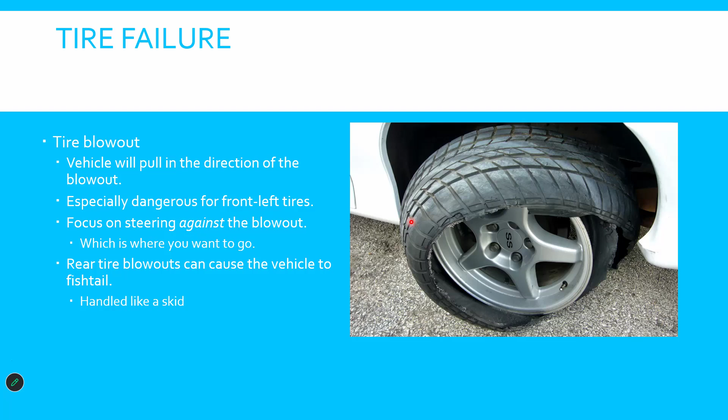You want to stabilize the vehicle if this happens, which just means if it's pulling to the left, you turn to the right and try to keep it as straight as you can. Pull off the road and turn on your hazards.

So why do we turn our hazards on? So people see you - yep, it's a flashing light, and people know that something's going on. If your hazards are on, all four of your blinkers are flashing at the same time, so it tells people there's some sort of emergency. Hopefully they see you in time because a flashing light will draw their attention.

That all make sense? Okay, here's a short video example of what a tire blowout could look like.

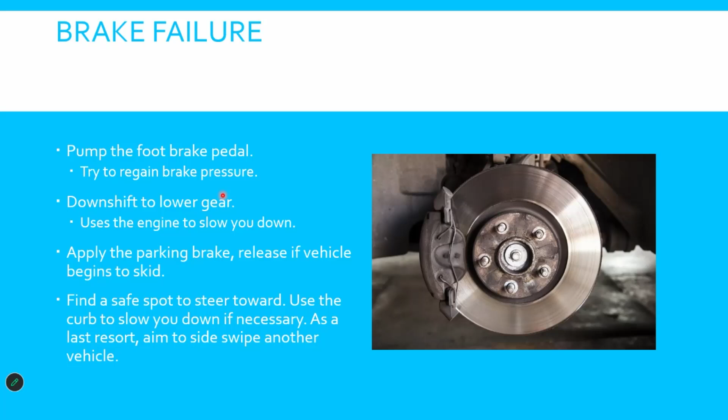Here's a video on how the brake system in cars work. It's good to know, just so you can understand how they work.

Welcome to Autotech Labs. Today we will see how an automotive disc brake system works.

Let's see the principle behind the disc brake system. The brake system works based on Pascal's law. The law states that pressure exerted anywhere in a contained incompressible fluid is distributed equally in all directions throughout the fluid. Let's make it simple.

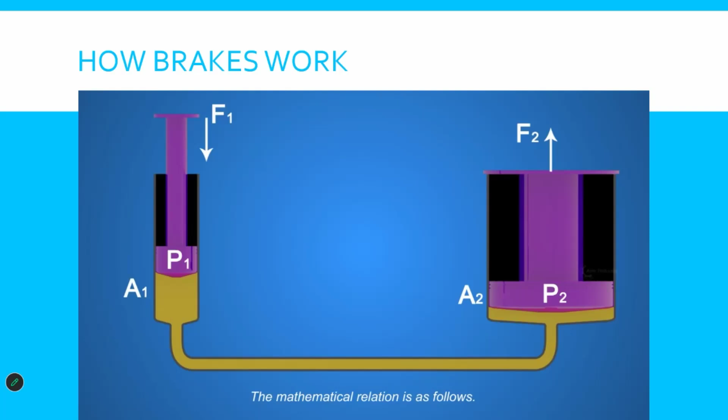Consider two cylinders with pistons, connected to each other, and filled with incompressible fluid. The mathematical relation is as follows: F1 is the applied force on the left piston, F2 is the received force at the right piston. A1 and A2 are surface areas of both pistons. P1 and P2 are pressure experienced by both pistons.

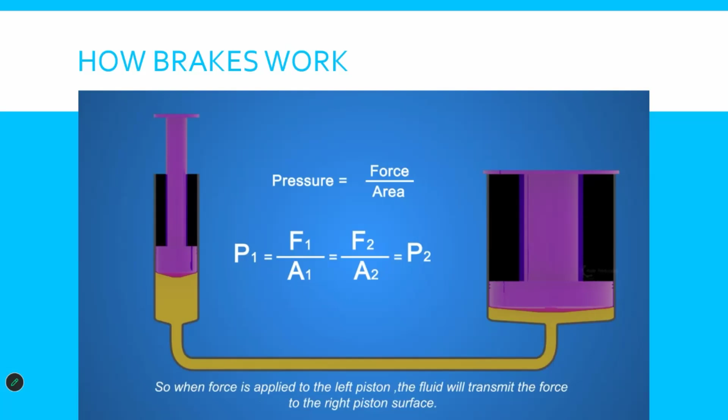Pressure can be stated as force experienced per area. So P1 equals F1 by A1, and P2 equals F2 by A2. According to Pascal's law, pressure on both pistons are equal, which gives us P1 equals P2. So, when force is applied to the left piston, the fluid will transmit the force to the right piston surface, but it will be a factor of the ratio of the two piston surfaces. This concludes that, with a small force F1 at the left piston, we get a higher force F2 at the right piston, provided A2 is greater than A1.

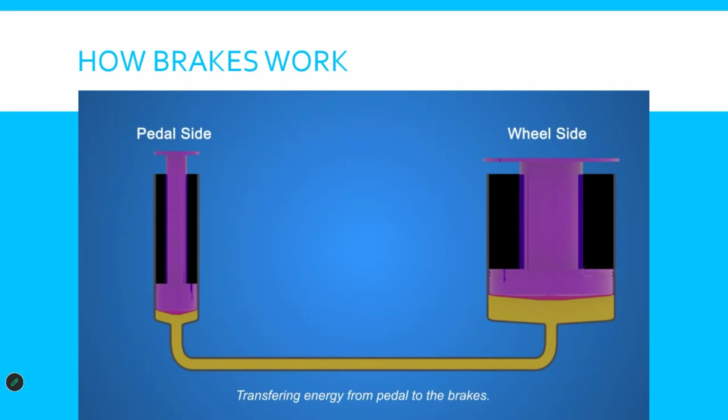With this, the left piston can act at the pedal side, and the right piston can act at the wheel side, transferring energy from pedal to the brakes. Now we know the theory, let's see how this works in real life.

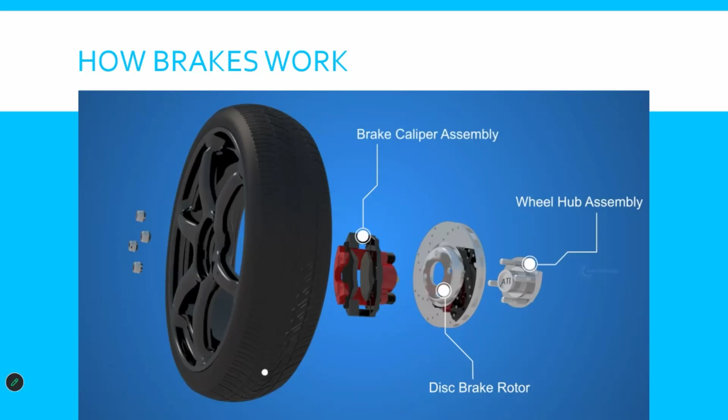Let's see the exploded view of a car wheel, and the parts involved: the wheel hub assembly, the disc brake rotor, the brake caliper assembly, the wheel, and the lug nuts. The wheel hub assembly holds the wheel and the disc rotor, and the bearing inside it allows their smooth rotation.

The disc rotor is the part to which the brake pads squeeze against. This creates friction that retards the rotation of the wheel. The disc rotor produces a lot of heat due to this friction, and the drilled holes provide ventilation to remove this heat.

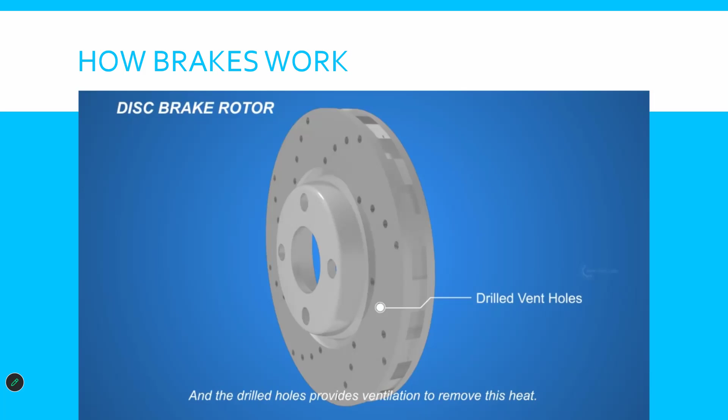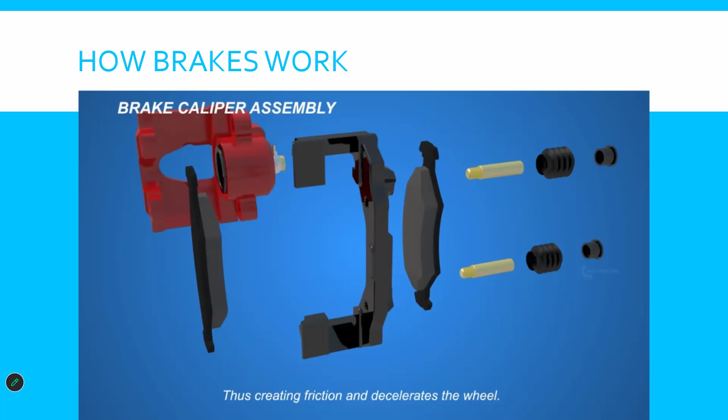The brake caliper assembly uses the hydraulic force from the brake pedal to squeeze the brake pads to the rotor surfaces, creating friction and decelerating the wheel. The caliper assembly consists of the caliper bracket, slider pins, dust boots, inner brake pad, outer brake pad, caliper frame, and inside it, the piston. The caliper frame has a banjo fitting, through which the fluid reaches the piston.

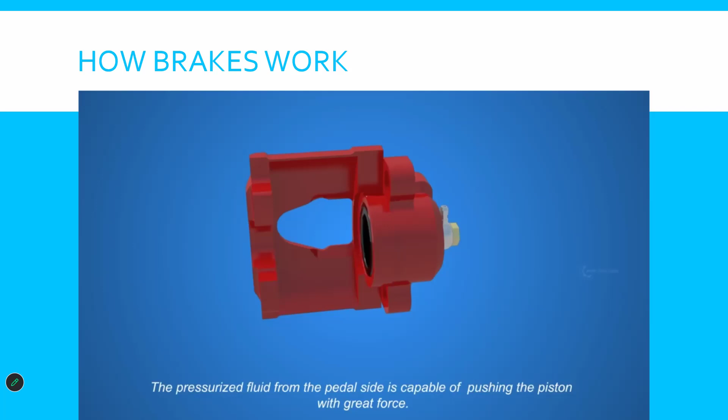The pressurized fluid from the pedal side is capable of pushing the piston with great force. Also, the caliper frame is free to slide along the slider pins within a fixed extent. Now we know the parts, let's see how it works.

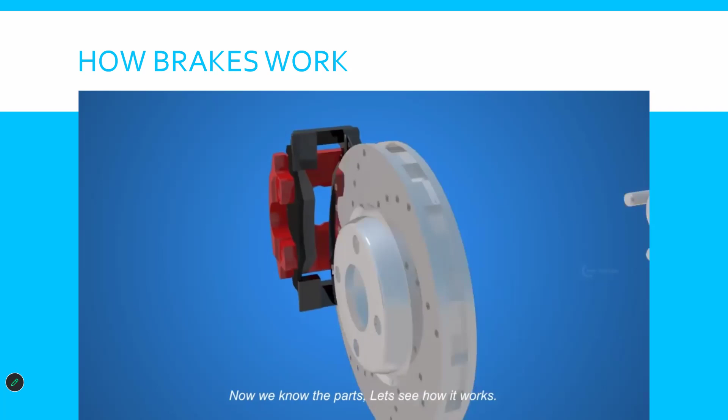When you apply the brake, the caliper will receive high-pressure hydraulic fluid from the brake master cylinder. The fluid will push the piston, which makes the inner brake pad squeeze against the disc rotor surface. As a result, the fluid's backward force will push the caliper frame along the slide pin, which makes the outer brake pad squeeze against the other side of the disc rotor.

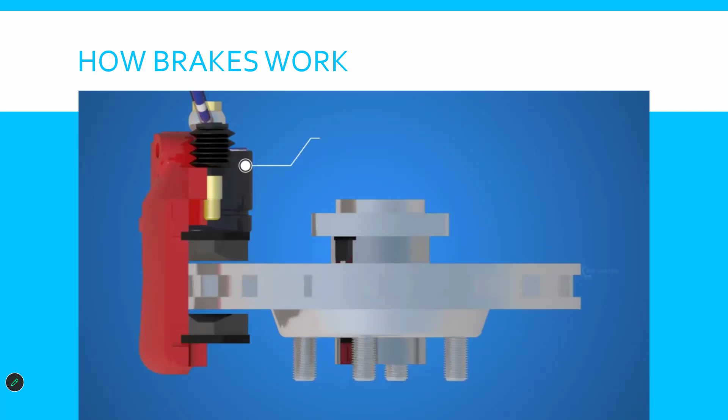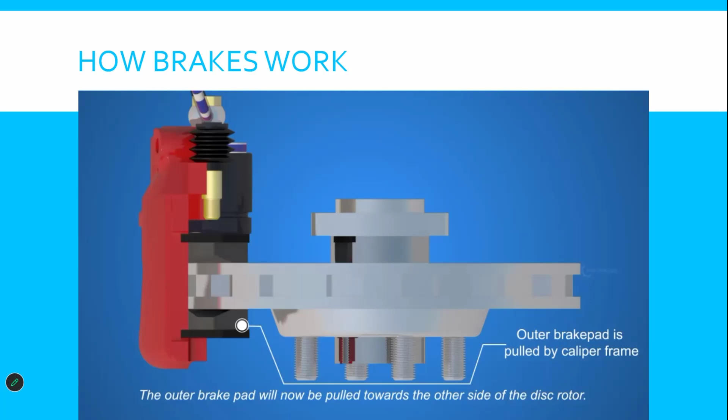Let's see one more time from the top view. The fluid pushes the piston, and the piston pushes the inner brake pad. Once the inner brake pad is pushed against the rotor, the fluid will push the caliper frame, and the outer brake pad will be pulled towards the other side of the disc rotor. This is how the disc brake system works on the wheel side.

In the next part, we will see what a master cylinder is, and how it transfers fluid.

That's a boring video, but that's basically how it works though. You've got your brake pads that push against the rotor, and the harder it pushes, the faster it's gonna stop. So, this is some steps to do, or tips, if you have brake failure. I will warn you, this guy is very excited, but if you have brake failure, he's got some good tips for you.

Hey everybody, I'm here today to tell you how to stop your car when brakes fail. If you are in the unfortunate situation where your brakes have failed and are not working, I'm going to show you exactly what you need to do to bring your car to a complete stop safely and effectively. Let's get right to it. I'm going to turn the camera around so I can show you exactly what to do.

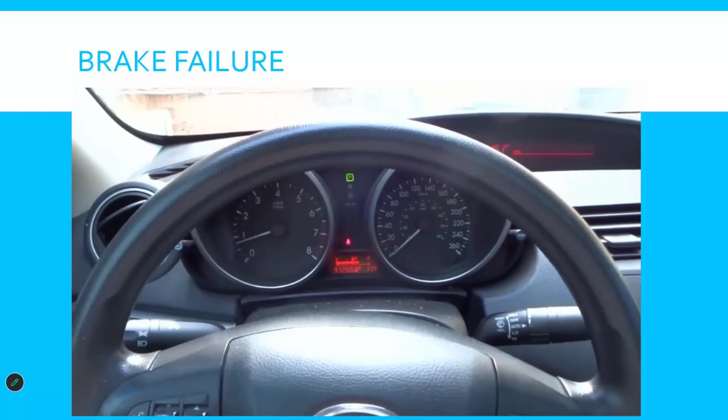I'm going to break it down into a step-by-step tutorial. Step number 1 is stay calm. I know your immediate reaction will likely be to panic and freak out when you push your brakes and realize that they're not working.

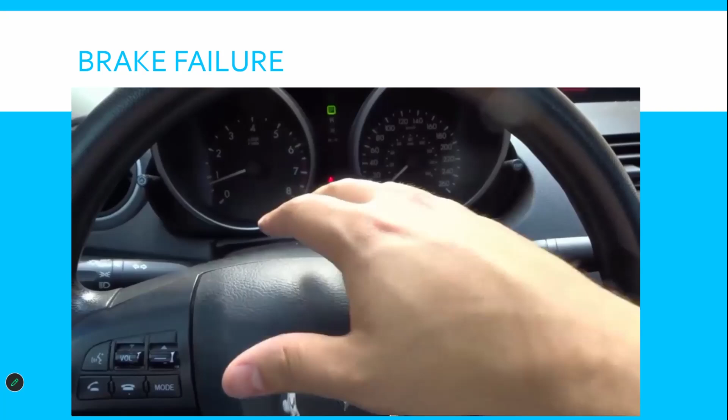That's one of the worst things that you can do. Staying calm will allow you to do the other steps effectively, remember what I'm telling you in this video, and actually do those things. So step number 1 is stay calm.

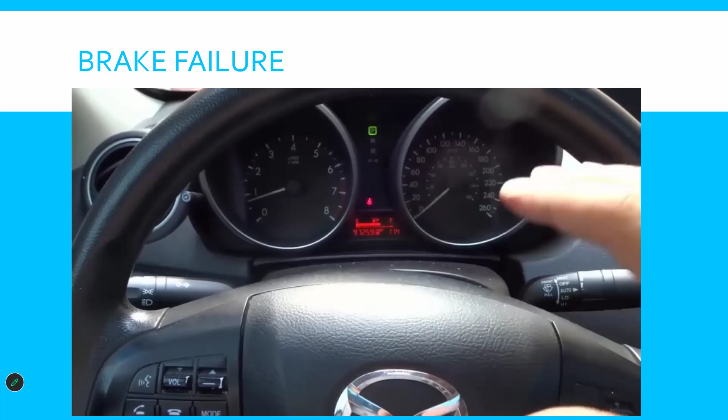Step number 2, put your hazards on, just like that. When you put your hazards on, it will let the other drivers in front of you, behind you, and potentially around you know that something is wrong with your car, that you're experiencing vehicle difficulty. When people see your hazards on, they'll give you some extra space because they know something is wrong, and that extra space can be very useful in bringing your car to a stop safely when your brakes have failed. So put your hazards on is step number 2.

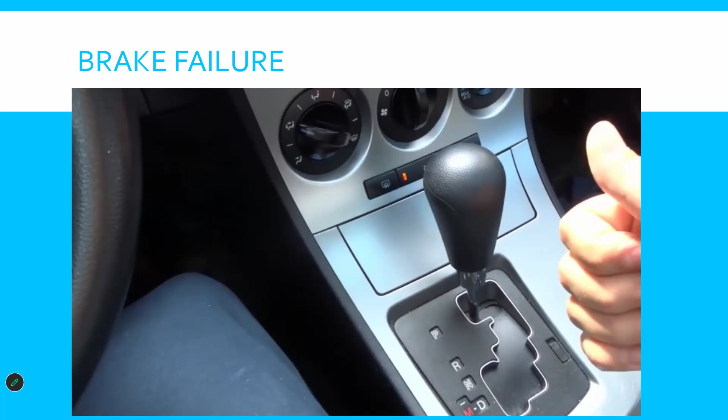Step number 3 is downshift. If you drive a manual car, it's easy to downshift: push the clutch in, shift to a lower gear, release the clutch. That will slow your car down.

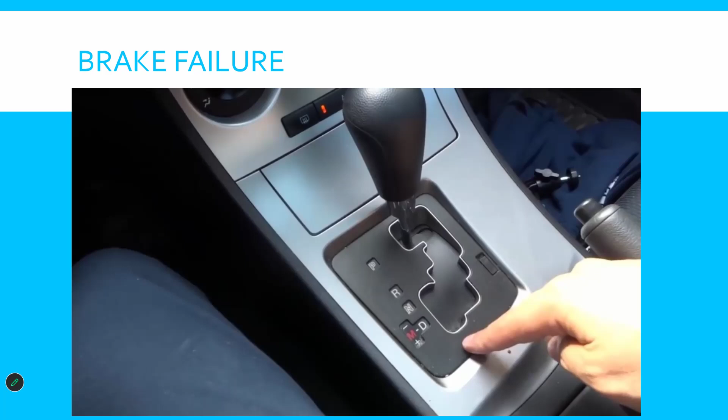If you're in an automatic car, there are a few different options. In most automatic cars, they'll have a shifting option over here on the shifter, so I would switch into this option, which would allow me to downshift. There's also sometimes in modern automatic cars paddle shifters which allow you to downshift. In some older cars there are different options. If you don't have this, there are options like the number 2, the number 1, and even the letter L that will allow you to downshift the car.

The one thing I'll tell you is make sure you're downshifting into appropriate gears. You don't want to downshift into too low of a gear and harm your engine. Make sure you downshift into a gear that's appropriate for your engine speed and vehicle speed. You don't want to damage your engine trying to bring your car to a stop. So step number 3, once again, is downshift.

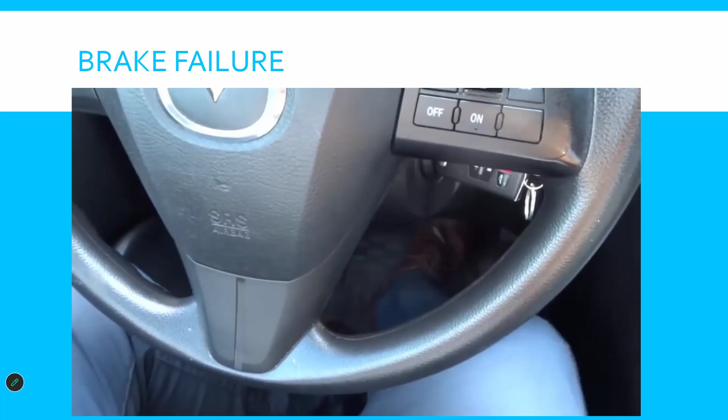Step number 4 is pump your brakes. What you want to do is pump your brakes. Sometimes that might allow your brakes to start potentially working again, or even barely working again. It might slow you down. It's worth a try—pump your brakes and see if it helps. That is step number 4.

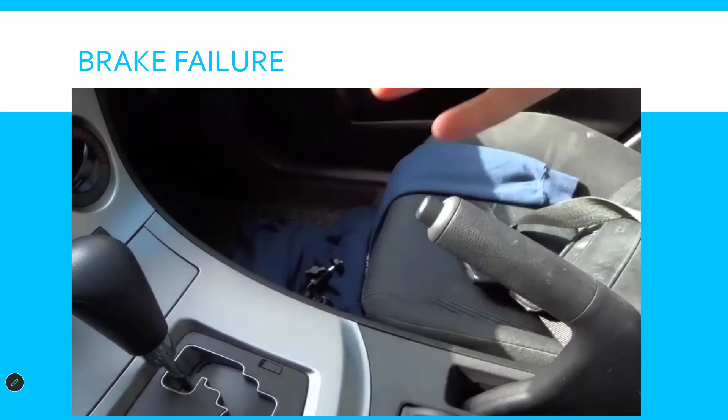And last but not least, step number 5. As you've downshifted and you're slowing the car down, and after you've tried pumping your brakes, your last resort to bring the car to a stop is to use your emergency brake. There's a specific way to do this, so please pay attention. I have an emergency brake right here. Now what you don't want to do is crank your emergency brake like that. That's one of the worst things you can do, because your car will likely skid to a stop and you'll lose control completely, and that's not good.

What you want to do instead—my emergency brake is down right now—is press and hold that button in, and slowly raise the lever up, just like that, slowly. That will slowly apply the emergency brake. It will act similar to the way your car brakes. You want to slowly and gradually bring it up. It's going to start slowing the car down. When the car's almost at a complete stop, you can fully pull it up, and that will bring the car to a nice, smooth, and slow stop.

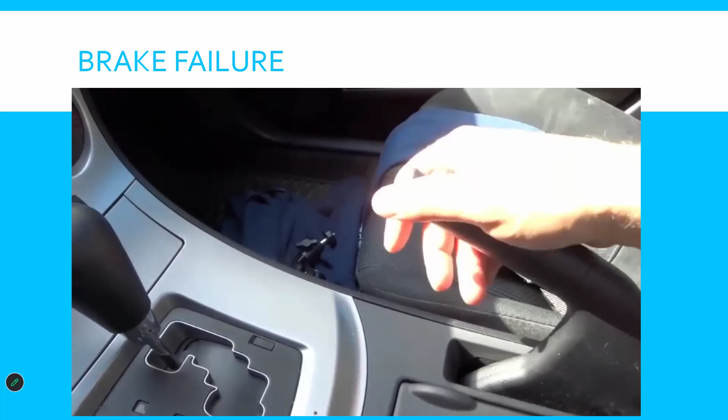Once again, very slowly: press and hold, slowly bring it up, just like that. And when the car is at a complete stop, you can then release it in the engaged position, which will make sure your car remains stopped, because you don't want to bring your car to a stop and then have the emergency brake drop down and the car keeps going. That's not what you want. So you want to slowly bring it up, and when it comes to a complete stop, hold it up just like that.

Now, one other quick note: do not turn your car off when your brakes have failed. Because if you turn your car off, you're going to lose your power steering, which will make it much harder to maneuver the car. If your brakes have failed, you want to have as much steering control as possible. You don't want to have failed brakes and then not have any power steering.

One of the best things you can do is leave your car running, let your engine run. It will power the power steering components, which will allow you to maintain steering control throughout the entire process.

Once again, if you're in the unfortunate situation where your brakes have failed, follow the steps in this video and you'll be able to safely and smoothly bring your car to a stop. When you've brought your car to a stop, don't keep driving it. Get it towed to a mechanic shop or someone who can look at the car and fix your brakes, fix the problem. Don't drive it again once you've brought the car to a stop, no matter how close you are to your house.

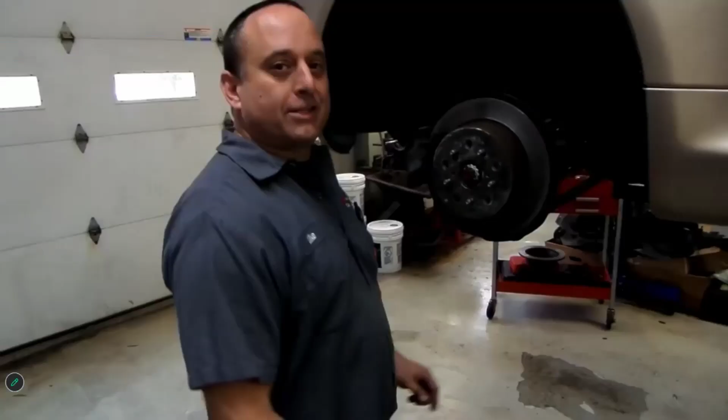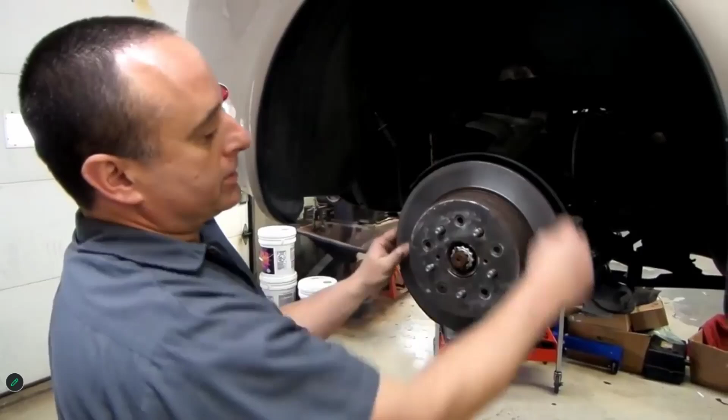Hey, it's Mike here at Danny's Fitzway again. For some of you advanced car enthusiasts, if you're ever wondering how your parking brake holds on a rear disc brake car, I'll show you one example of how this works. We'll take your caliper off and hang it out of the way. That caliper's for your normal disc brake, but inside your disc brake we actually have a drum surface. And inside the drum is a set of parking brake shoes that are separate from the main braking system. When you pull on the handle or push on the parking brake, the shoes expand and squeeze against the inside of the drum, and that's what holds your car in place when you're parked on a hill. So since it's separate from your actual brakes, like your brake pedal, it's like a whole other brake system, and that's why it will still probably work if your brakes do fail.

All right, so engine failure. Engine failure will happen with little to no warning. I've had this happen a couple times where they're driving along and the car just dies. Steering is still possible, so if your engine dies you can still steer. You might lose your power steering, which will just make it harder to turn. Power steering didn't come on cars until the mid 80s, I believe.

But you'll still be able to turn. You want to shift to neutral when your engine first starts sputtering or shuts off. Putting it in neutral just releases everything off that engine, all the pressure and everything. Begin moving towards the shoulder, turn on your hazards, but do not brake. Why do you think you don't want to brake if your engine dies? Yep.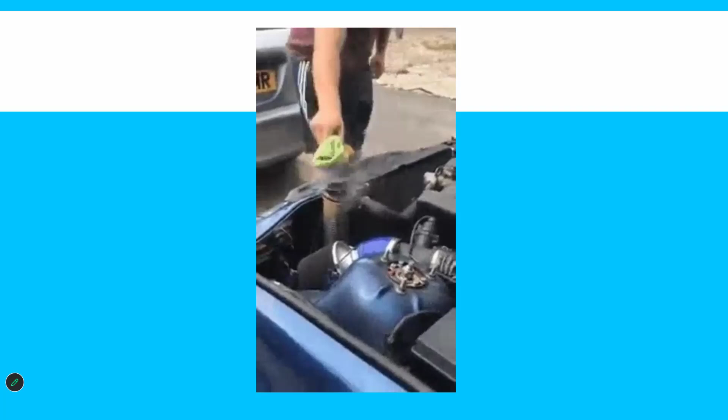So this is what you don't want to do. All the smoke is there because it's overheating, and he does have a towel to do it because he knows it's going to be hot, but that's how much pressure it's under. All of that is over 250 degrees, so instantly you'd get burned.

So don't ever take your radiator cap off unless the car is cool—it's going to be extremely hot. Even when your car's not running and you first shut it off, it's going to be under pressure for a while, so it can definitely still burn you.

So breakdowns can happen to anyone. This will show you what possible problems could be, based on certain things shown here.

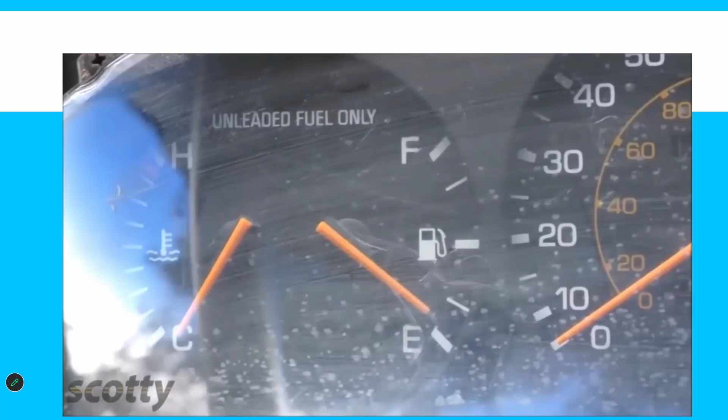In almost all modern cars, the fuel pump is inside the gas tank. Gasoline actually lubricates the fuel pump passing through it so the bearings don't burn out. So if you ran out of gas and keep cranking the engine to try to start it, the fuel pump will suck air and burn the bearings out. Some of these fuel pump assemblies can cost over $1,000 to replace. So if you're out of gas, don't keep trying to start the car.

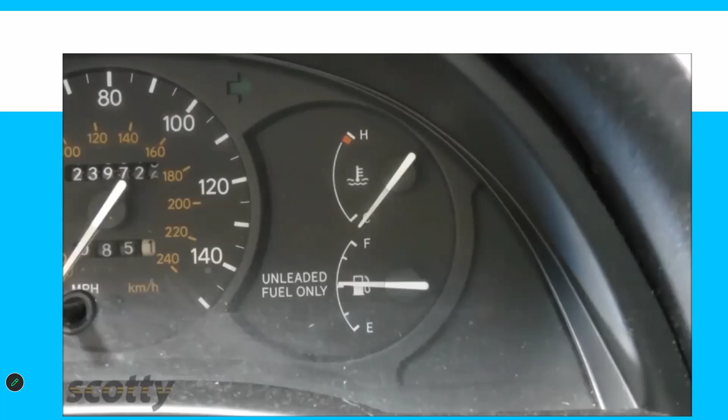Get some more gas, fill it up, and go on your way. But if you do have plenty of gas, here's the next thing to check: you could have blown a fuel pump fuse. It's always a good idea to have a few spare fuses in your glove box—you don't need a giant box like I have, but you can get ones with 4 or 5 fuses in them. Then go to the fuse box and check the fuel pump fuse and any other fuse like the EFI for the fuel injection—it tells you on the back what fuse goes where.

Here's how you can tell if a fuse is good: if it's continuous like this, the fuse hasn't blown yet, but a blown fuse looks like this.

As you can see now, the loop is burned off and it doesn't connect anymore, so the fuse is blown. So of course you have to have spare fuses to begin with, so make sure you got some in the glove box or the trunk.

But here's another trick. Say you got a 10 amp fuse that's blown. Well, you could try a 15 or a 20 amp fuse just to see if it can make you home again. It really isn't going to hurt anything. And you might be able to make it home if there's a minor short that'll blow a 10 amp fuse, but not a 15 or 20.

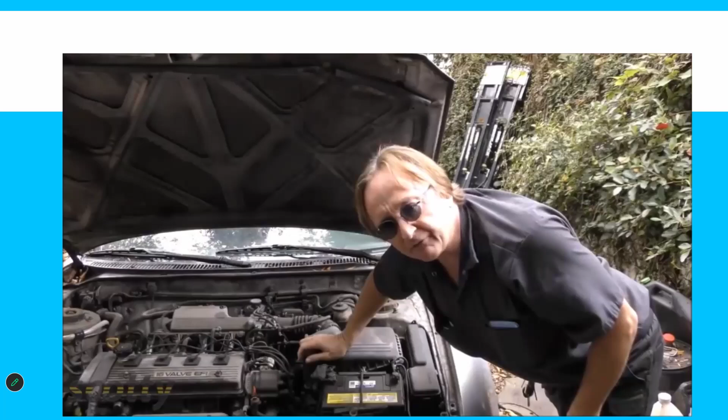Now let's say you don't find any blown fuses. Well, you got the hood open. Check the fan belts to see if any of them came off. For example, if your alternator belt had come off, the alternator will stop charging the battery, you'll run out of electricity, and the car will stop running.

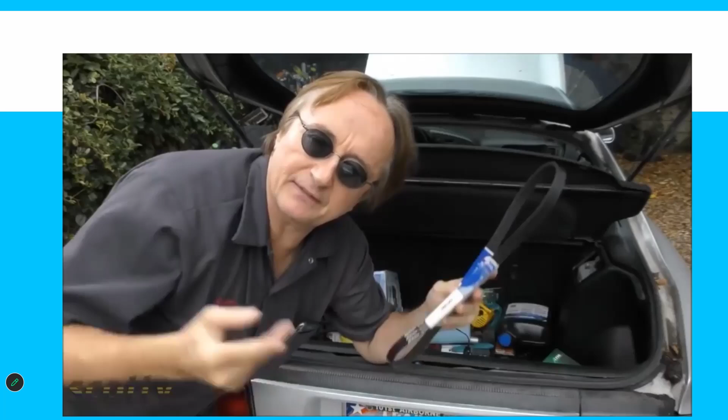And in that case, be prepared again. Be like me. Have a spare fan belt for the alternator in your trunk, so if it ever goes bad, you got one to put on.

And if you really want to be prepared, you can have one of these little jump starter packs in your trunk. It can jump it after you put the fan belt on. Or if you don't have a fan belt or you can't mess with that kind of stuff, these little packs have a reasonable amount of power in them. They'll sometimes start a car and you can drive a few miles, turn the headlights and everything off, and you might be able to make it to a gas station or someplace running on this little battery alone.

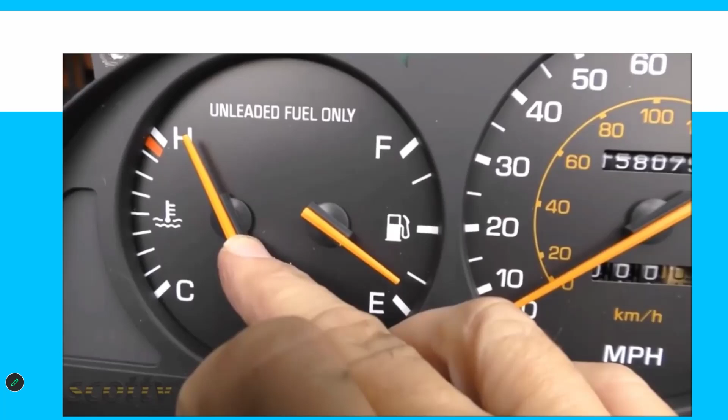Now let's say your car stopped running because the temperature gauge got in the H. Of course you'd have to wait till the engine cooled down before you could do anything, but once it cools down, if you're prepared like me and have a spare jug of coolant in the trunk, add the coolant to the radiator.

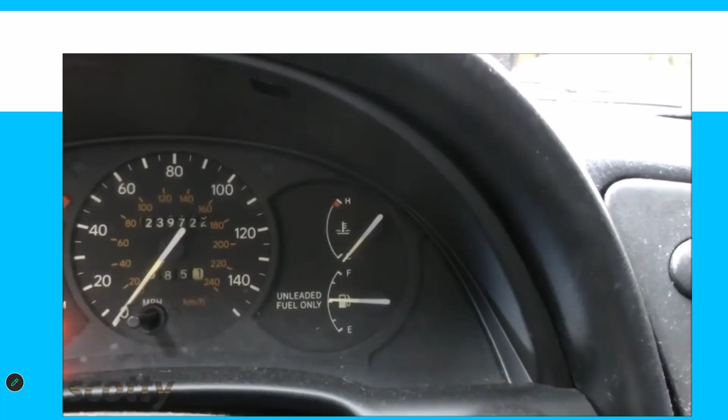Then you can start it up, turn the heater on full blast, and then drive while you watch the temperature gauge to make sure it doesn't go back up to the H. Here's how that works. The heater core is a small radiator, so if you run the heater, that helps dissipate any extra heat, and as long as your temperature gauge doesn't get into the H, you can drive it back to a safe place, then find out what's wrong and fix it.

And the last thing to check if your car dies on the road is check your oil. You wouldn't believe how many cars I've had towed over to me over the last 50 years that had run out of oil because no one ever checked the oil.

So if you've been bad and don't check your oil enough, have 2 or 3 quarts in the trunk. So if you do get stuck somewhere and you're out, you can pour some in. A lot of times the engine will be damaged if you really ran it completely out of oil, but there's always a little bit left in the sump, and sometimes just putting in 2 or 3 quarts, it'll start up and sound fine and still run.

So now you know what to do if your car dies on the road. With a little preparation up front, you can often save yourself. And remember, if you have any car questions, visit the Scotty Kilmer channel.

All right, so there's some good tips, some good info, but you don't have to be as extreme as him and carry coolant and everything. Maybe some basic things or some oil be enough, but a lot of people don't carry fuses and coolant and stuff in the car with them. Those are some good tips.

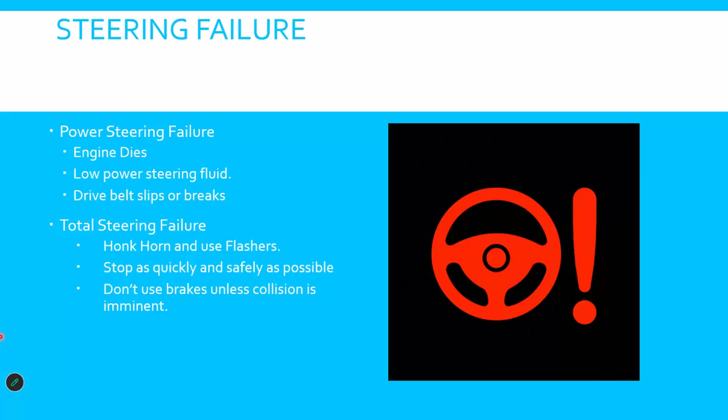So here's a video on how power steering works, just a basic understanding of it. Some of these videos I have to show you guys.

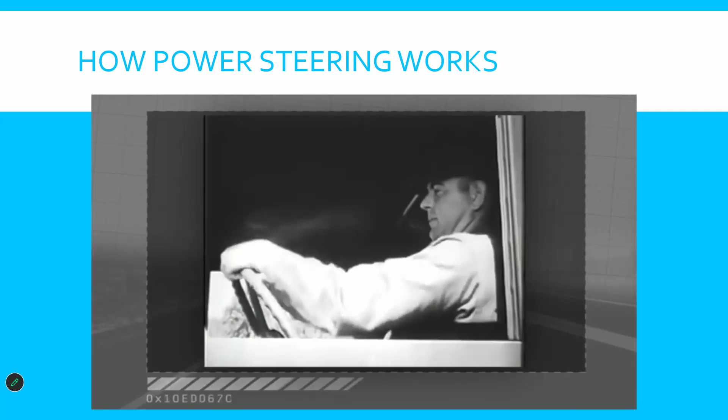In the beginning, there was only one kind of steering. You want to move the car a different direction? You grab the steering wheel and put your shoulder into it. Power steering was either unheard of or very elite. Steering a heavy vehicle by manual effort only emphasized the need for a steering assist. We huffed and heaved and sweated behind the wheel until the first mainstream car with power steering hit showrooms - the 1951 Chrysler Imperial, something they called Hydraguide.

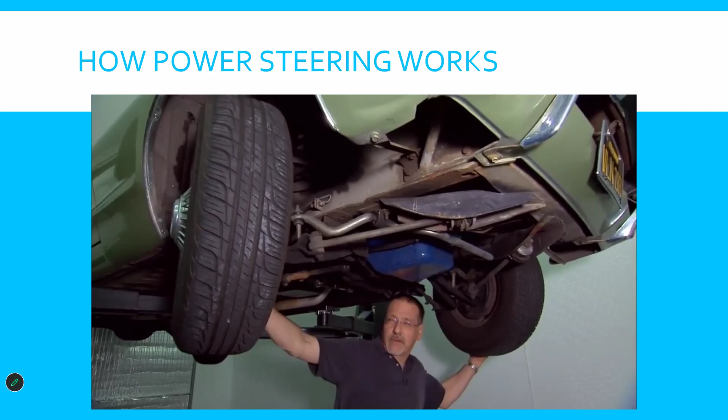And then for 50 years, power steering didn't really change a lot. Hydraulic was hydraulic, like on this '67 Cougar. You basically have your steering rack that is very classic in just about every car of the era, but to help you move that, you've got this power ram right up here. This piece is nothing more than a hydraulic ram that pushes one way or the other to get your wheels to move which way you want. It is told how much and what direction by this control valve up here, and all this connects to your steering column. Where does it get all the pressure? If you look up in there, you see that pump - that's the power steering pump, run by a belt off the front of the engine. That's one of the big problems with these systems: it's constantly putting drag on the engine, creating a bunch of pressure even if you're not using it to steer. That's called a parasitic loss, and that can sap MPG and power.

But these days, power steering has changed dramatically. Welcome to the era of EPAS, electric power-assisted steering. Now, underneath this 2014 Jeep Cherokee, a decidedly modern vehicle, we find a very different steering system.

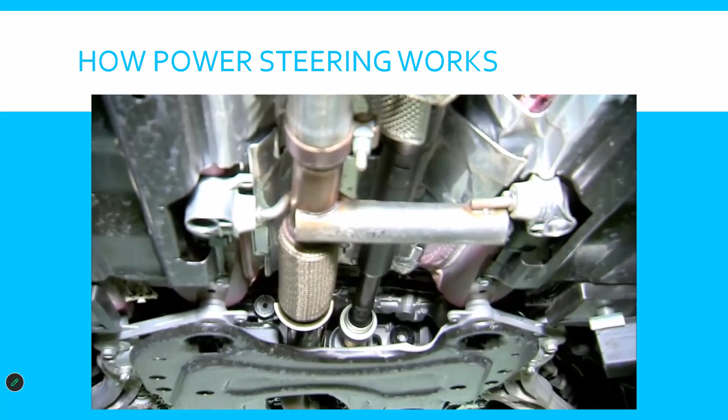Electric power steering is here. If you look up in this vicinity, you're going to see the electric motor which is sitting on the steering rack, those arms and linkages that move the wheels left and right. Another model is to take that motor and move it further up and put it on the actual steering column, kind of heading up toward the firewall. The effect is the same.

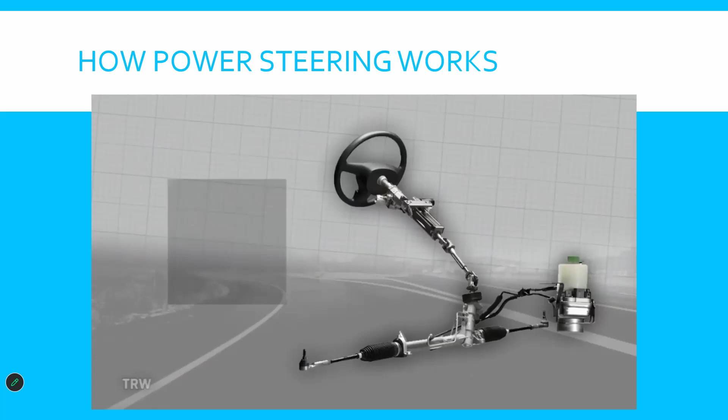The electric motor and its electronics sense your effort on the wheel and add their own in kind, of course, in the same direction. The efficiency, the compactness, the cleanliness, and the accuracy of this system versus hydraulic is the big idea. Note there are also hybrid systems that remain hydraulic but replace the belt-driven pump with an electric one. The bigger trend, however, is to go fully electric.

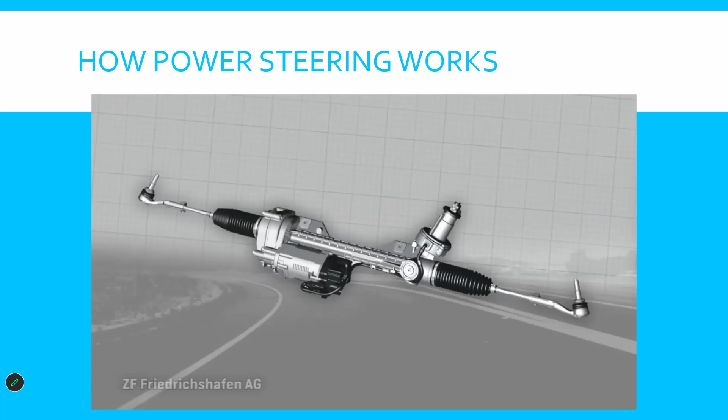Okay, so as you've picked up on, there are 4 major benefits to electric power steering. Let's run them down. First off is efficiency. ZF, which makes a lot of electric power steering systems, says they can save 90% of the energy that is parasitically wasted by hydraulic systems.

Put another way, Chevy says their 2013 Malibu gets 2.5% better MPG solely because it has electric power steering. They ballpark that at 120 gallons of gas, or about $500 saved across 10 years of ownership.

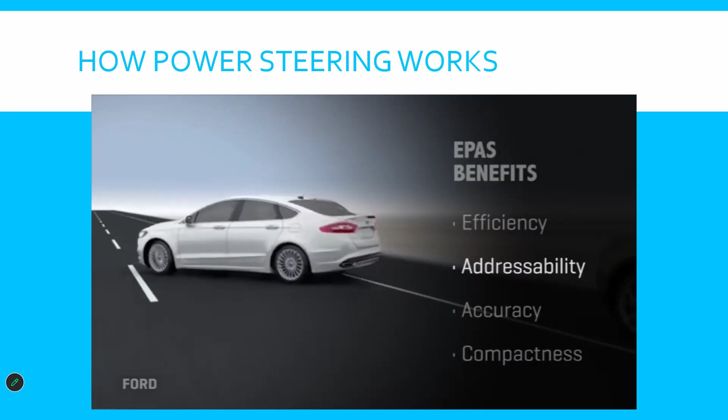Next up is addressability. Because it's an electric component, it can be harnessed to the vehicle's control systems to automate things like automatic parking assistance, lane departure correction, all kinds of things that are nudging into the area of autonomous driving. It can also be used in the background for cornering improvement and cornering control.

Now we have accuracy. Because it's driven largely by software, changing its behavior and keeping it accurate with a feedback loop that a computer can monitor is quite easy. That's not the case with hydraulic systems. If you want to change their behavior, you largely have to go engineer new physical components for them.

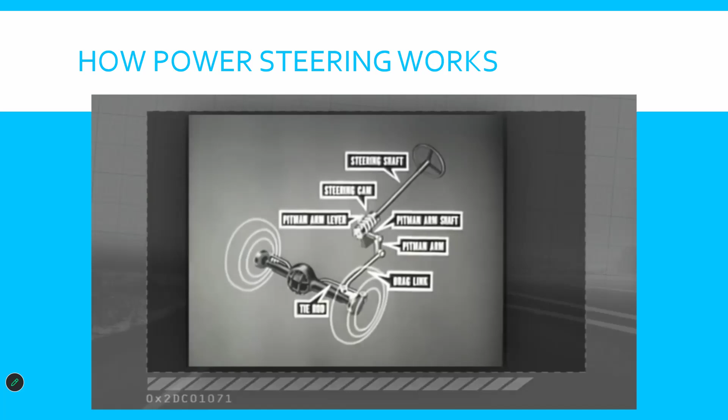And then there's compactness, a big deal with automotive packaging designers. Instead of having a pump and belts and valves and a power ram, you just have an electric motor and some wires going to and from it. That allows a lot of space to be freed up and for things to be kept very compact and very cool in the engine bay.

So it's a win-win-win-win. Then why do so many driving purists kind of push back on electric power steering? Well, part of it is because it's not what we've always had. It's not hydraulic, and let's face it, we've all gotten used to hydraulic steering, and automakers have dialed it in quite nicely. And early electric power steering systems did have some numbness to them and some poor on-center feel.

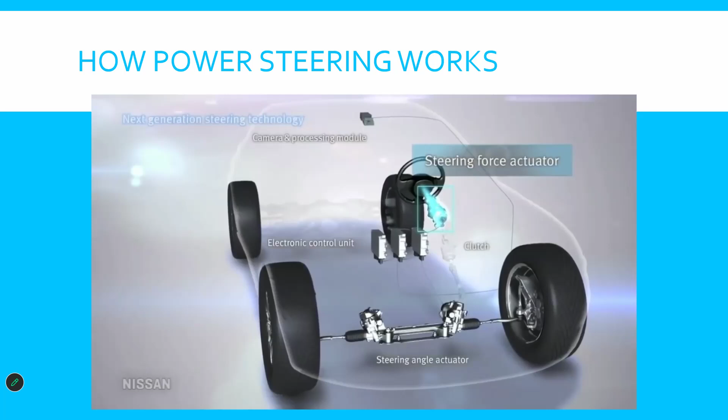That's been largely corrected in my experience. I have a very hard time telling a good electric system from a refined hydraulic system until I look under the hood. The future? When electric power steering like we've seen today becomes steer-by-wire electric power steering. That means the steering wheel basically becomes a game controller and has no mechanical connection to the front end at all. That's down the road a few years, and that's a separate Car Tech 101.

That's just the basics of how it works. You won't be tested on the specifics of it, but it's just good to know.

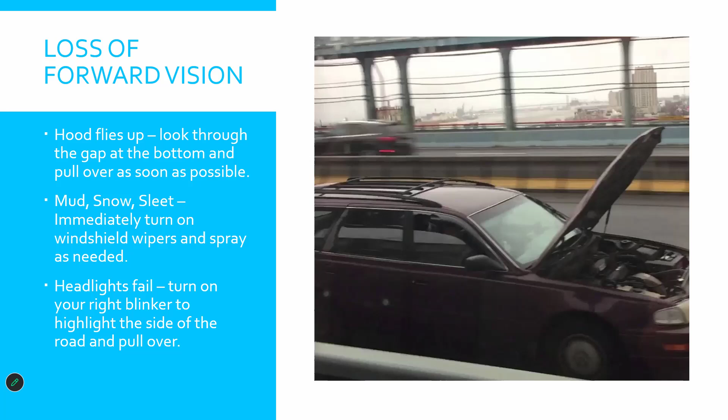Vehicle fires. If your engine catches fire, steer off the roadway to a safe open spot and turn your engine off. Try to avoid grass if possible, just because it'll catch fire and spread. I got you, Leland.

Move at least 100 feet away from the vehicle. I would go farther than that. As you're going away, I'm sure you won't forget your cell phone. Remember to call the fire department, call 911.

A compartment fire, you want to use water or a fire extinguisher to put it out. It's going to be something on the inside of the car, maybe from smoking or something like that. So if you have a fire extinguisher, use it. If you have water, even a bottle could help a lot as soon as it starts. If it's uncontainable, get away from the vehicle and call the fire department. Get to the side of the road, get out of the way of everything, get out of the car, call the fire department, and get as far away as you can. That all make sense?

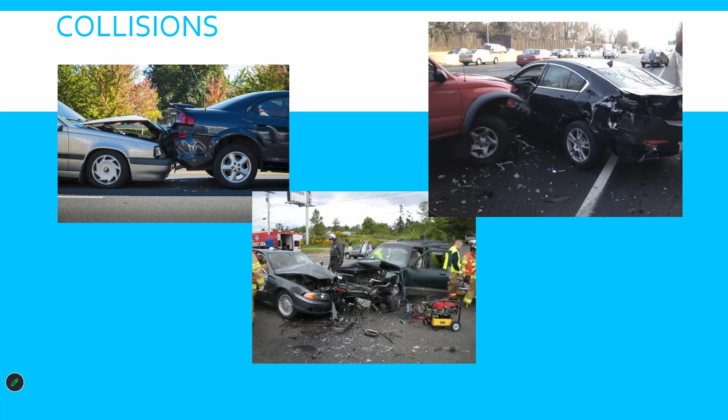When you're faced with a head-on collision, slow until the other driver can return to their lane. So if you have to, slow way down, flash your lights, honk your horn, do something to get their attention. A lot of times if they're coming over the center line into your lane and it's looking like it might be a head-on, it's because they're distracted. So a horn is a noise and lights are visual—something that hopefully they see or hear, either a flashing light or your horn.

That'll help you. Swerve to the right. So why do you want to swerve right and not left? You swerve left, you go towards oncoming traffic. Good job. So if they're coming towards you and you think you're going to get in a head-on collision, slow way down and move to the right.

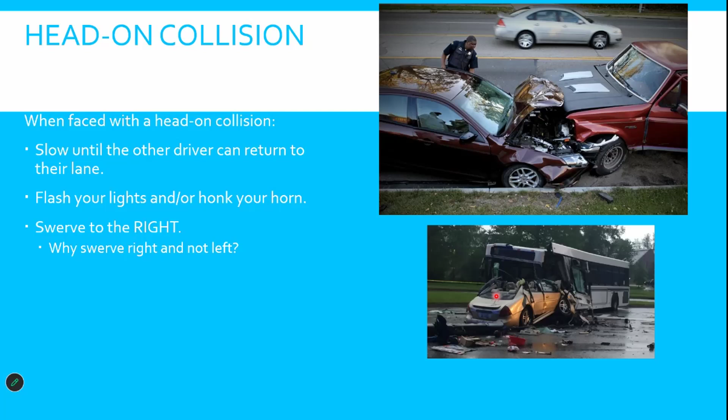A rear end collision. So maintain a safe following distance, including when you're stopped at an intersection. We talked about this with a lot of you guys on your drives the last few times we've been out. Keep a good distance between you and the car in front, because if you're rear-ended, you don't want to get pushed into them.

And that keeps them out of it. If you are in front and there's a driver behind you that is super close, don't hit your brakes real hard, but you can tap it just so the brake lights turn on and off a couple times. That might be enough to get their attention to realize they were a little too close. Creep forward if possible, or move to the right, or move to the front left or right zone.

One thing you'll see cars do, like say this black car, he's right behind him but he doesn't hit him. This black car stops all of a sudden real quick. This car will, instead of just stopping in a straight line, move over to the shoulder to the right side while they're slowing down. The reason people do that is instead of hitting them like they would if they're next to them, they're not going to hit them, right? So it slows them, you can kind of come to a stop next to them, but it also gives the car right behind them room to come to a stop, instead of being right behind them.

If collision is unavoidable, release your brake just before the collision and brake immediately after. Why do you think you don't want to keep your foot on the brake if they're going to hit you? Because if you have the brake on, you won't be knocked forward as far, so there'll be more of an impact.

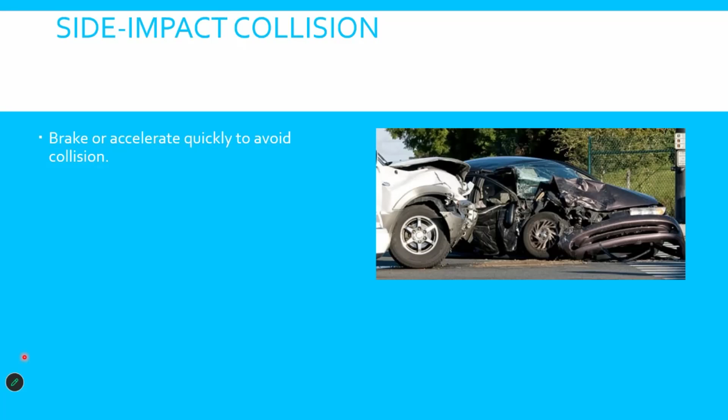So controlling the force of impact. The force of impact is judged based on speed, weight, and time between impact and stopping. Speed and weight are the biggest factors in this, it's what's going to determine how bad it is, honestly. The heavier the vehicle is, the more damage it's going to cause. The faster you're going, the more damage it's going to cause also.

Safety belts, seatbelts, it's what keeps you in the car on impact, right? We saw some videos where people flew out of the car, because they weren't wearing their seatbelt. If the car's going even 30 miles an hour, you're moving 30 miles an hour with it. If it suddenly stops because of an impact, you're still going 30 miles an hour. The seatbelt will keep you in the car. Airbags will deploy to help you as well. Generally, airbags will not just go off for no reason, you have to be in a pretty hard hit for them to actually go off. And then child safety restraints, just make sure if you have kids in the car that they're properly in car seats or whatever they need to be in, buckled in.

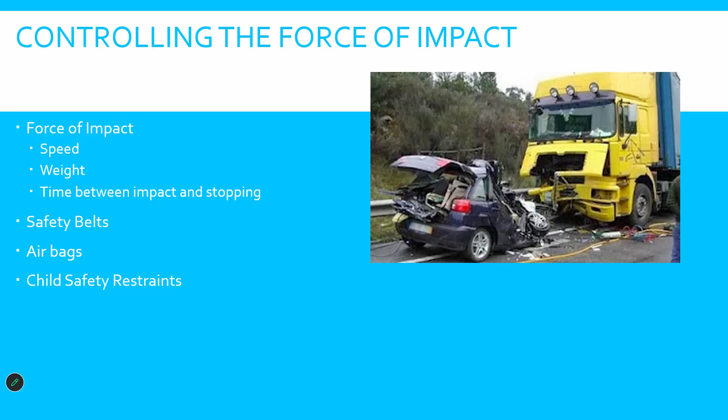Here's some information on airbags.

Airbags. The idea of using a giant balloon to cushion you if you crash has been around since the 1950s, yet it wasn't until 1974 that General Motors offered the first commercial car with a driver-side airbag. Today, all new American cars and 91% of all new European cars are fitted with airbags.

Your driver airbag works in a very similar way to a rocket, they both use solid fuel. In your car, this is found in a compartment behind the steering wheel, like this. When it's ignited, it's contained and the gases released inflate the airbag. Whereas with a rocket, the solid fuel is at the bottom, so when you ignite it, the uncontained release of energy propels the rocket skyward.

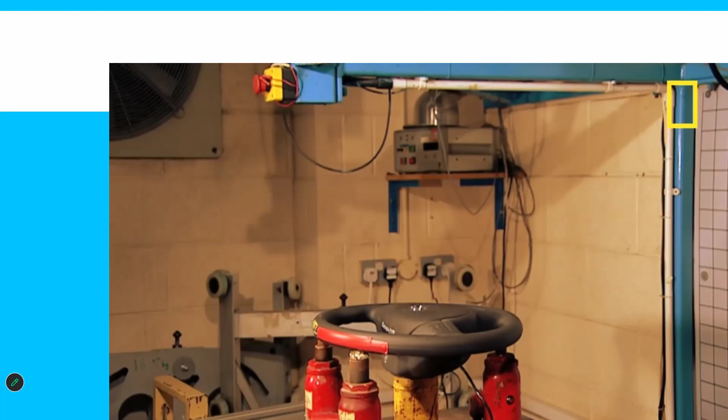The gas blows up the airbag pretty quickly, so we're going to film this test rig to show you just how fast it inflates. That yellow weight up there simulates somebody's chest. Now, as it's dropped, it will pass this sensor, which will activate the airbag to inflate in time to cushion its fall.

Well Rick, that happened so quickly. What speed was that? The airbag inflates in roughly 35 milliseconds, which to scale it for you, it takes approximately 200 milliseconds to blink. Wow, which is pretty quick. Now that's why I didn't see it.

You don't need to worry about suddenly being hit by an airbag because a sensor in your car continually measures acceleration and deceleration. It'll only deploy the airbag when it senses a dramatic deceleration resulting from a sudden impact.

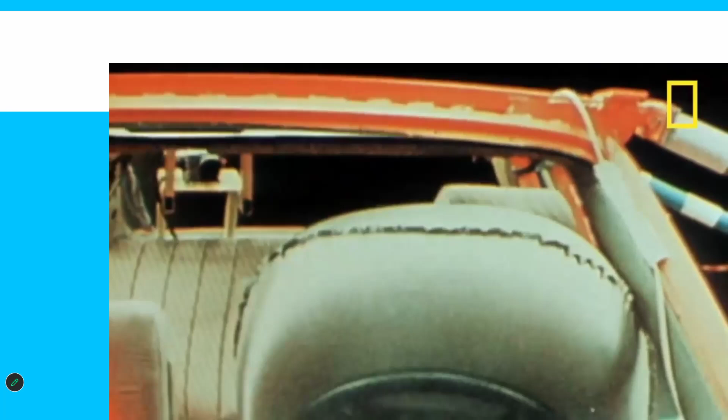And the bags themselves are getting clever. They can now alter the amount they inflate according to the weight and position of the person, which means they're less likely to give you a hard punch in the face.

Now check this jacket out. It can surround you in airbags. It's already being used by some of the police riders in Japan, Spain and Brazil. The idea is that if you're on your motorbike and you get thrown off, this tag gets pulled, the jacket inflates and it can soften your fall.

Now it needs a damn good pull. Darren, if you could. Now it improves your safety and it's pretty damn sexy too.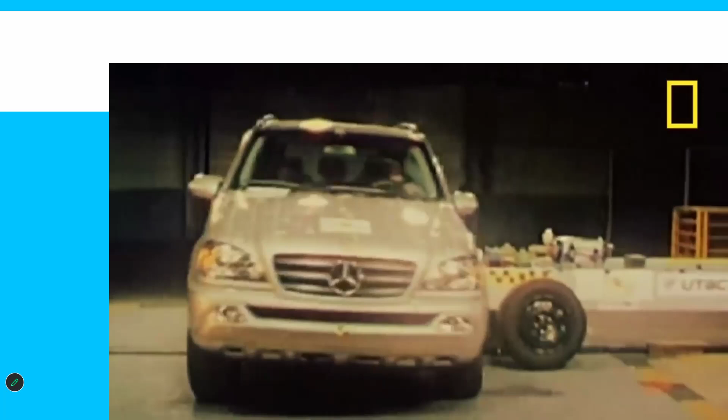In today's cars, airbags can be in the roof, in the side, in your seat. There are even airbags to put you in the right position before you hit another airbag. But wherever they are, an airbag will always react so quickly that if you blink, you'll miss it.

So that's just a little bit of how they work. So what's it mean if airbags just go off? They're not going to go off, meaning they're not going to inflate randomly while you're driving. It'll go off if you are going at a higher rate of speed and suddenly stop.

Impulse equals force times time. Here's my favorite demonstration of impulse. I have two eggs, same mass. I'm going to try to throw each egg with the same velocity, which means they have the same momentum.

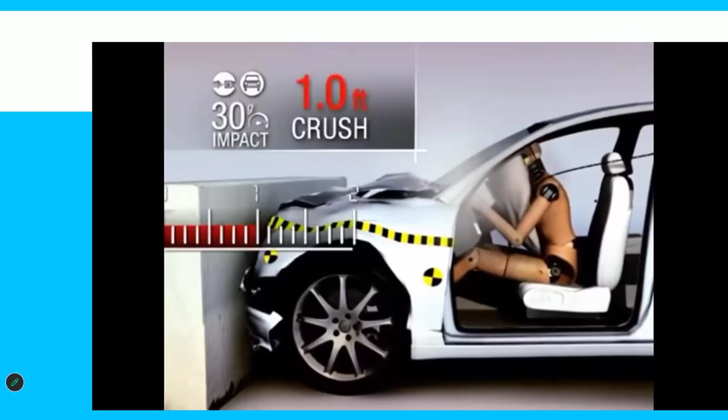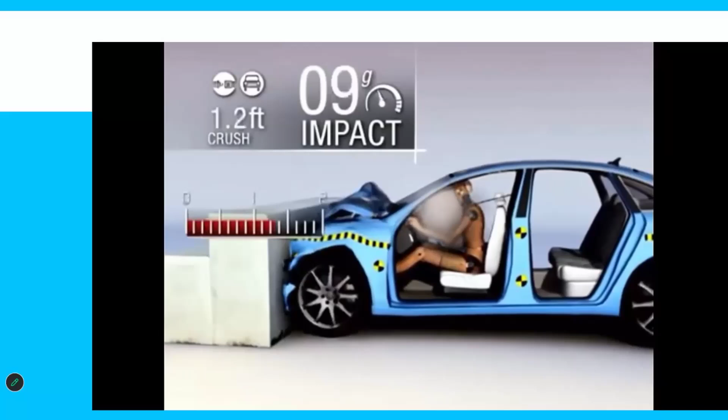Let's also assume the car's front end crushes 1 foot with uniform deceleration of the passenger compartment throughout the crash. In this crash, the driver would experience 30 Gs. However, if the vehicle's front end was less stiff, so it crushed 2 feet instead of 1, the deceleration would be cut in half to 15 Gs. This is because the crush distance, or the time the force is acting on the driver, is doubled.

Extending the time of impact is the basis for many of the ideas about keeping people safe in crashes. It's the reason for airbags and crumple zones in the vehicles you drive, and the reason for crash cushions and breakaway utility poles on our highways.

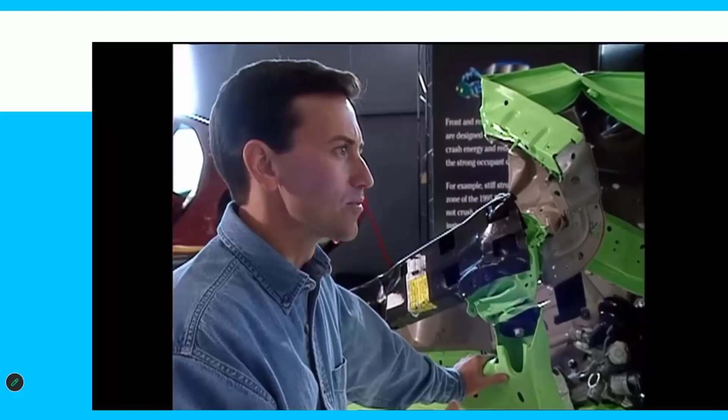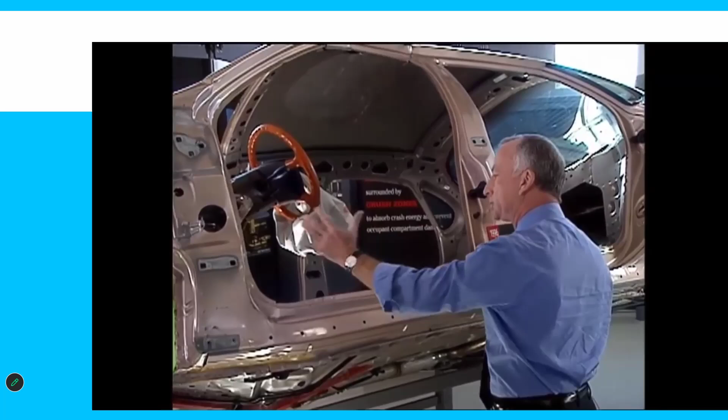We use the stripped down body to illustrate the concepts of good and poor structural designs for modern crashworthiness. Why is it important for the vehicle structure to perform well in a crash? This is what's left of the body and structure of a car that was in a crash, and we use this to illustrate the point. Basically, we want the occupant compartment, or the safety cage, to remain intact. We don't want any damage or intrusion into this part of the vehicle during the crash. We want all of the damage confined to the front end.

So even though all this metal looks the same, it's actually different. The green metal is intended to crumple, to give in the collision. If we can crumple the front end of the car without allowing any damage to the occupant compartment, then the people inside can be protected against serious injury. Basically, we want the front end to be buckling during the crash so that the occupant compartment is slowed down at a gentler rate. Kind of like jumping off a step and keeping your knees straight versus bending your knees when you land.

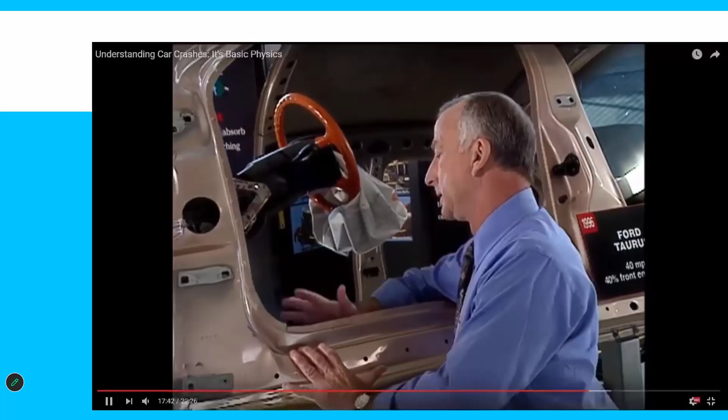Exactly the same concept. So this is a vehicle that did well because there's very little intrusion anywhere in the occupant compartment. These elements here, even though they're strong enough to hold an engine and suspension, actually buckled and crushed just like they're designed to do. So the damage is confined to the front end.

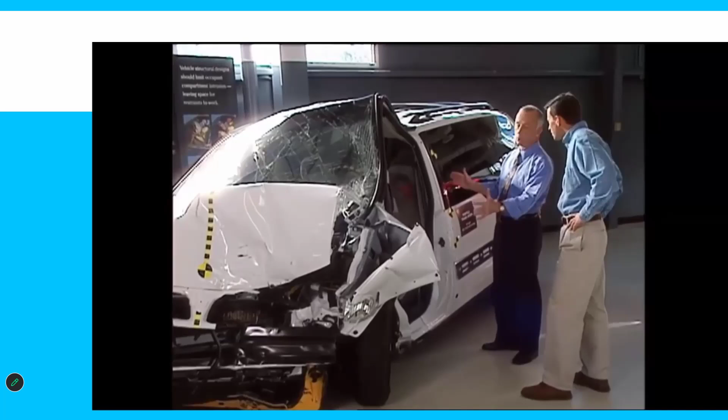We look at a vehicle like this, and this is an example of a very poor safety cage. This vehicle was in a 40-mile-an-hour crash, and as you can see the occupant compartment has collapsed, it's been driven backwards. As a result, the driver's space has been greatly reduced. So someone sitting in this vehicle is obviously at a high risk of injury. This is an example of poor crashworthiness.

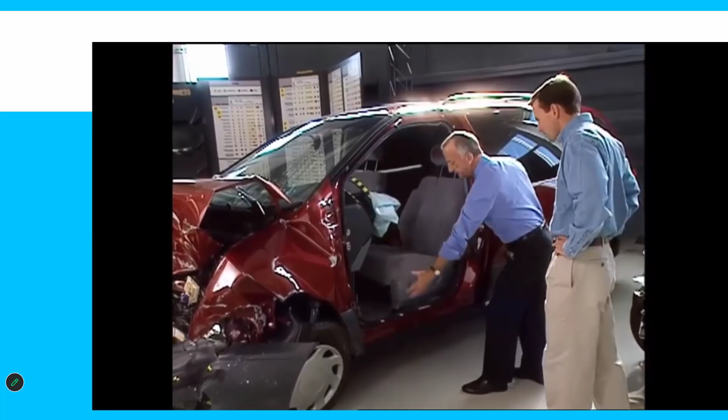But this vehicle was in the same crash, 40-mile-an-hour offset crash, and you can see that now the safety cage has remained intact. There's very little intrusion anywhere. The damage is confined to the crumple zone of the vehicle. This is the way it should be. A person in a crash like this, wearing their seatbelt and protected by the airbag, can walk away with no injury.

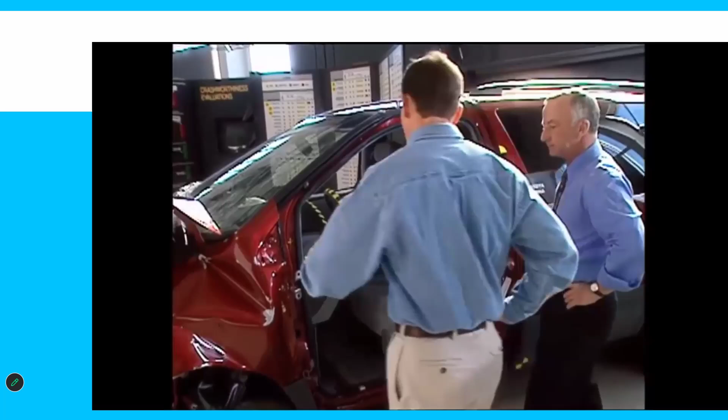If I stand over here and look towards the rear of the car, ignoring the airbag, this doesn't even look like it's been in a crash. That's right, this is good performance, good crashworthiness. In our shipping box analogy, this is an example of a strong box. The people in this box will be protected.

So that's a little bit about how they actually go about crumple zones in the car. The goal is the front hood area should crumple and the main cabin area should not. That makes sense.

So if you have a collision, you want to stop immediately, move the vehicle to the side of the road unless there's too much damage that it won't move, and then turn off the ignition. Depending on how bad the crash is, there could be leaks, so you want to turn the engine off so it doesn't start a fire.

Try to get off the road, just for traffic. If you cannot, and the car does not move, stay where you're at, call 911, let them know what's going on. If you damaged a parked vehicle or property, try to find the owner. Like if you're in a parking lot backing out and you accidentally hit their car. If you can't find the owner, leave a note with your contact information. You don't want to be accused of a hit and run.

If you get involved in a hit and run, it's a much more serious fine that you'll get. I would even take a picture of the note you put, just so you have proof that you couldn't find them and you left a note there. Then they can't call in and say nothing was left, and they can't accuse you of a hit and run.

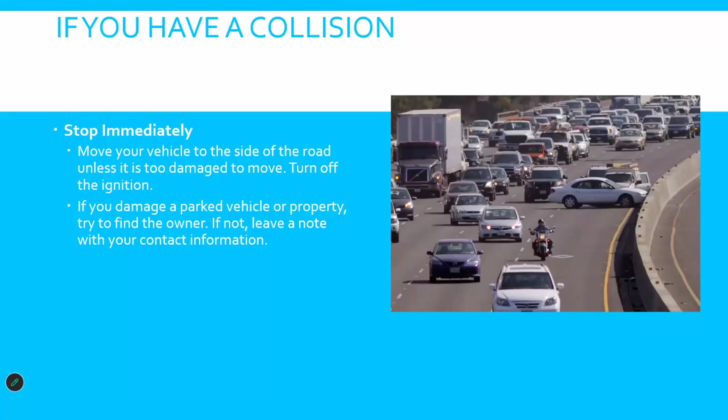But try to find the owner if you can. You'll end up giving out information for your insurance and everything to get it covered that way. But if you make a mistake, own up to it.

If you have a collision, aid the injured. Never move an injured person unless there's danger of fire or another collision. Sometimes you can't tell, but if someone is hurt and you move them, it's going to make it worse. So unless it's absolutely necessary, don't move anybody. Send for paramedics if anyone is seriously injured, and if you can, provide basic first aid as needed. Just try to help out.

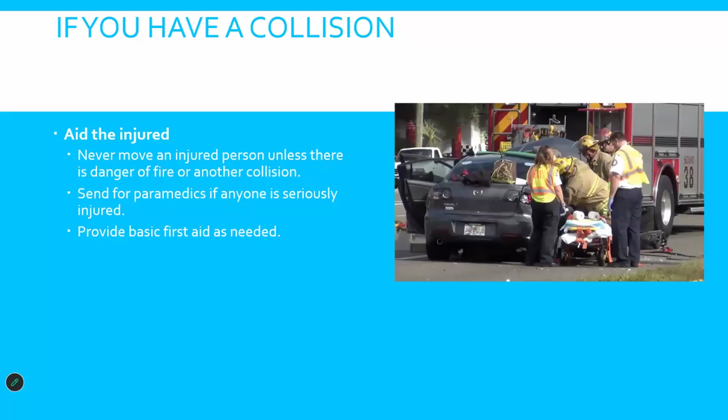Be aware, and if you need to, have someone safely direct traffic if it's safe for them to do so. This just ensures people don't run into you or another car, and doesn't make the accident worse for everybody.

You must call the police if anyone is injured or killed. That's kind of a no-brainer, but don't freak out if someone's injured. If someone gets hurt, just call the police and let them do their job.

Washington does not require police if no one's injured. So if you get into a car crash and nobody is hurt, you do not have to call the cops. It's recommended you do, though, to get a police report, since a lot of insurance companies are going to want it.

You want to provide accurate facts and never admit blame. So you don't want to say it was my fault or it was their fault. Just get the facts of what happened.

You're going to exchange information. Get the name of anyone involved, any passengers, any witnesses, anybody there. You'll want to get their address and give them yours, the driver's license number, license plate number. You'll end up giving your insurance information to them and get theirs from them, then note where everyone was sitting.

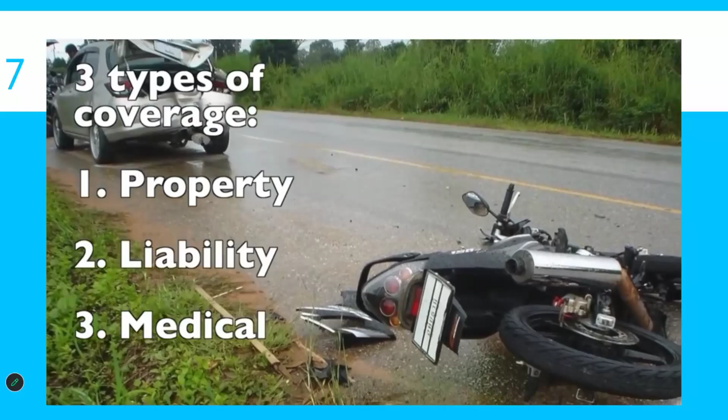Car insurance protects you from a huge financial loss. Basically, you pay a premium, usually monthly, to your insurance company, and in exchange, if you get into a wreck, the insurance company will help you cover your losses. Car insurance includes 3 different types of coverage. Number 1, property, which will pay if your car is stolen or damaged. 2, liability, which pays for legal obligations to others for bodily injury or property damage. And number 3, medical, which pays for hospital bills, rehabilitation, and sometimes lost wages or funeral expenses.

Part 2, money matters. So how much coverage should you get? Well, that depends on different things, such as your car's value, whether you own the car outright, and how much in damages you could afford to cover out of pocket on your own. Naturally, your monthly premium will vary depending on your amount of coverage. For instance, it costs more to insure the Ectomobile than it does to cover Mr. Bean's little mustard yellow car. That's the way of the world, kid, and don't you forget it.

Very important note: just because you pay premiums, that doesn't mean you'll pay nothing when you get into a wreck. Most likely, you'll have something called a deductible. The deductible is the amount of money you have to pay before your insurance starts kicking in. So let's say you total your $5,000 car in a wreck, and your deductible is $1,000. That means you'll pay the first $1,000 to get your car replaced, and your insurance will pay the remaining $4,000. In the US, nearly all states require that you have car insurance if you're going to own or drive a car, so it's super important to get it. The remaining states still require that you prove you could afford to cover all damages if you get into a wreck. So basically, for the privilege of not paying a monthly premium, you're gambling potentially hundreds of thousands of dollars, if not more, so we'd say, crowd, get insured.

Applause, applause, applause, applause. Part 3, how to get insured.

This is actually really simple. You can get quotes online or over the phone very quickly from dozens of competitors. The insurance company will need a bit of information about you and your car. They'll also likely run a credit report and look up your accident history. Once you get a quote you like, you'll start paying premiums, and they will send you your insurance card, which you should keep with your car at all times.